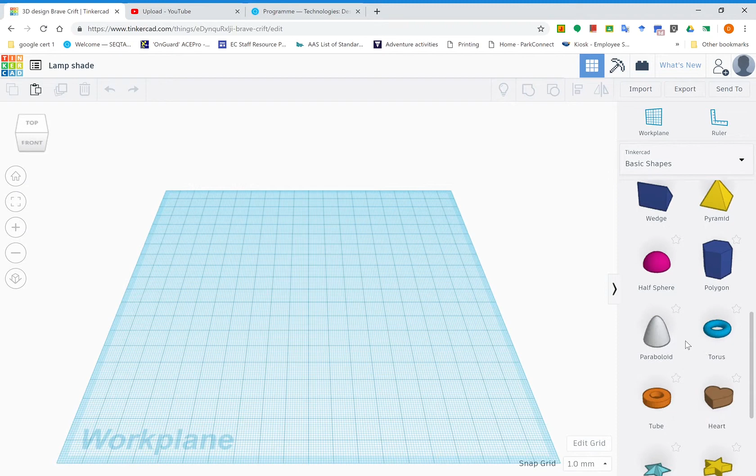First things first, always name it before we go any further. So we've got the lampshade up top there. Don't need to adjust the work plane on this one, but over here we've got a whole heap of different shapes, and you can choose whatever shape you like. You might want to do a half sphere or a polygon, but I'm going to show you how to do it with a paraboloid.

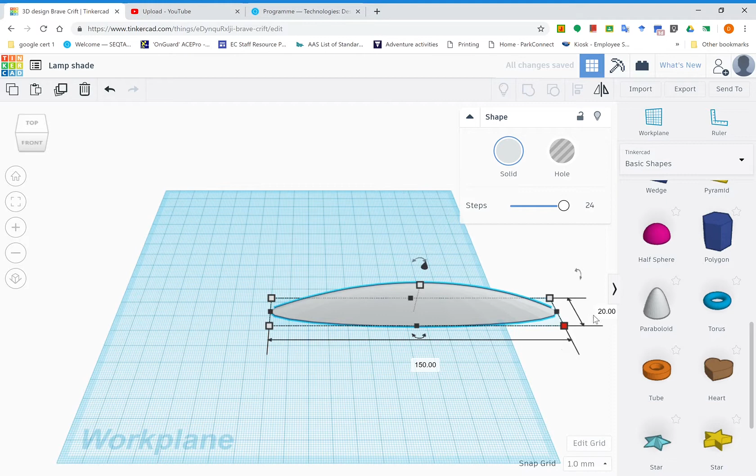So we're going to put that in here for starters, then change some of the dimensions. This bit's actually nice and easy, but big. 150 by 150 is about the size that will work for us. Move that up into the middle of the work plane once you've got that sizing in, and the height we will make 100. So it's quite sizable, like that.

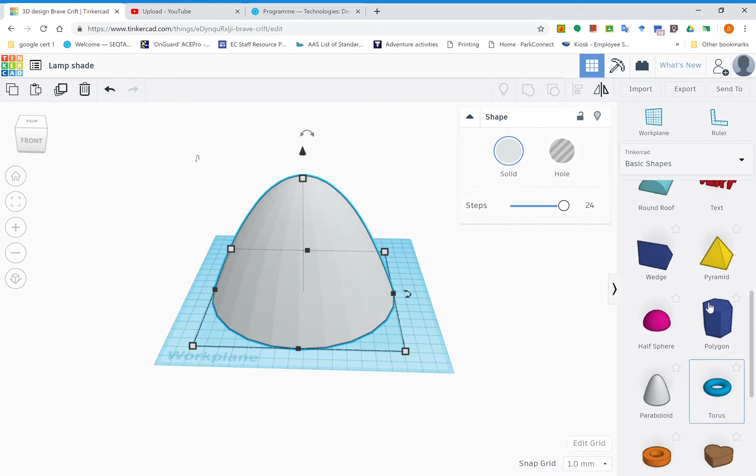The next thing we need to do is create a flat space on the top here. That's not too hard either, so we go back up here. This time we're going to create a hole using a box, or a negative space I should say. We're going to make this about 100 by 100, and 20 high is fine.

Now this one, we haven't used this particular grab button much so far. Click on this one here and you'll see it comes up with 0.00 things here. That is just the place where it is positioned on the work plane. We're going to go on this one here and lift it up 80.

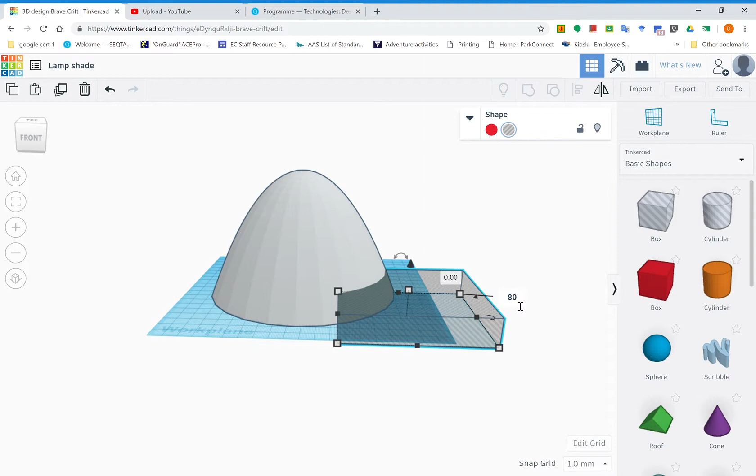And you watch what happens. It now goes up on the work plane a bit higher. It's now measuring off the work plane 80 millimeters. This little trick will be really helpful when you go to assemble your lamp. So now all we need to do is just drag that across, so you can see it's now sliced the top of the paraboloid like that.

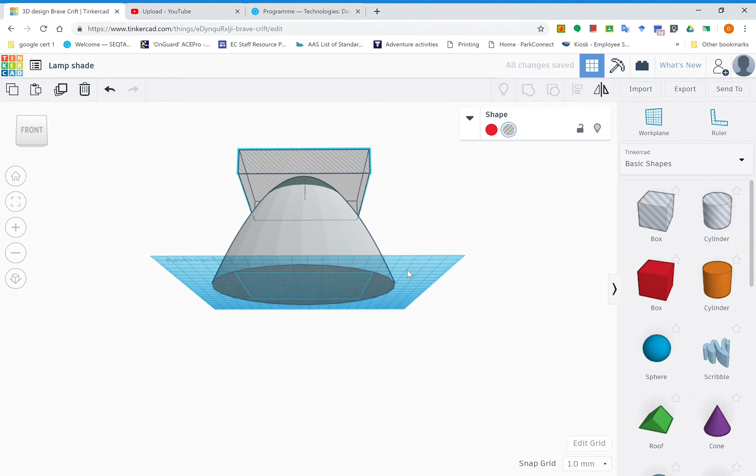And now we're going to group those two together like this, and now you can see that shape has got a nice flat base on it, and that's what we need to be able to attach onto the rest of the arm. Now at the moment the inside is not hollowed, so to hollow it, it's really quite easy.

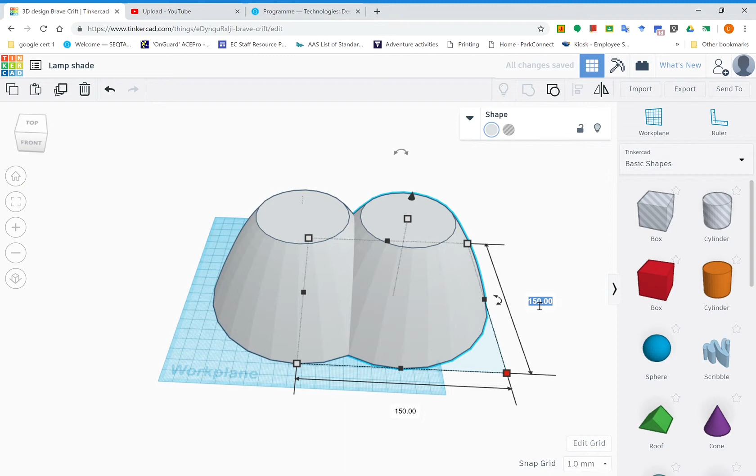We're going to copy this, then paste it, and all we're going to do is shrink the dimensions a little bit. So this one we're going to make 135, and this one 135, and we're going to drop the height by 10 millimeters, so 70.

And you can see it's just a little bit smaller than the other one. It's interlocking at the moment, but that doesn't matter. We're going to change it from a positive shape into a negative shape, and then we're going to use our align tool, which we've used on previous ones, so I'm hoping you remember how to do it.

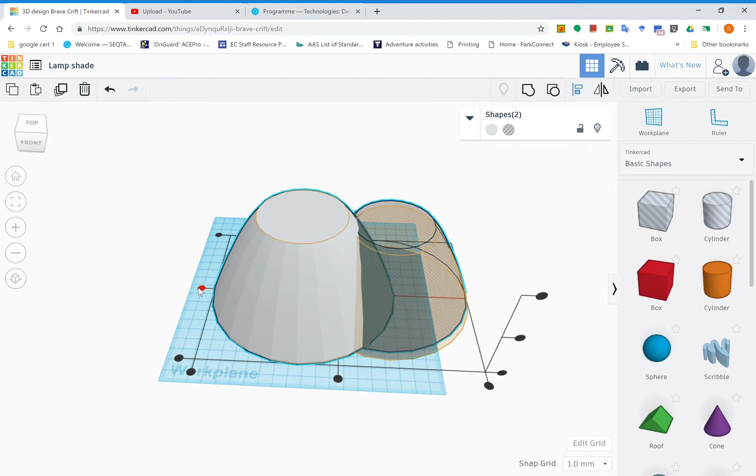And we're going to bring that across into the middle there, bring it right across here, and then put it back in the middle. So it should be in the middle there, middle here, and down the bottom there. And if we roll this up, you can see underneath it's now got a negative space in there.

All we do now, same as we've done before, group that together, click TinkerCAD, and it will save. So you can use this same idea for any of the other shapes here that you might want to turn your lampshade to look like. You don't have to do this particular one. Be creative, come up with something unique, and I'll look forward to seeing your work.